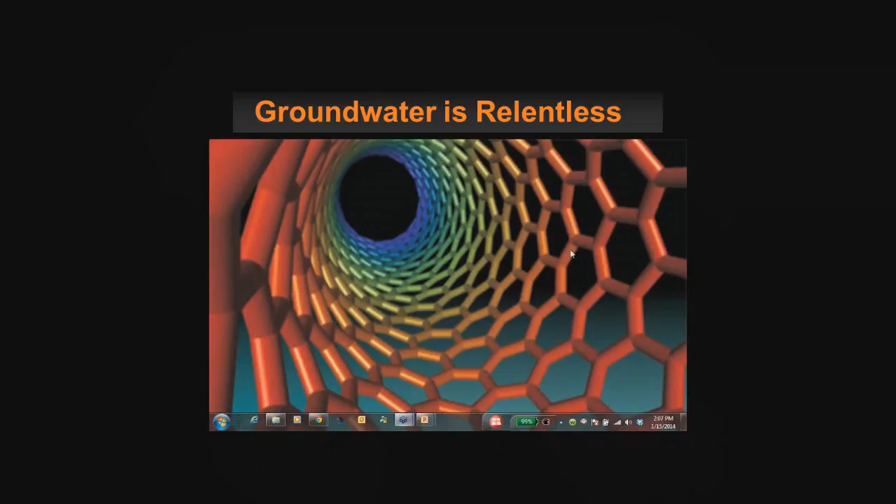Thank you, John. As everybody knows, groundwater, or more importantly, groundwater infiltration can be very relentless. The chances of water infiltrating any project are very high, especially since there's so much water on the planet, over 326 million trillion gallons.

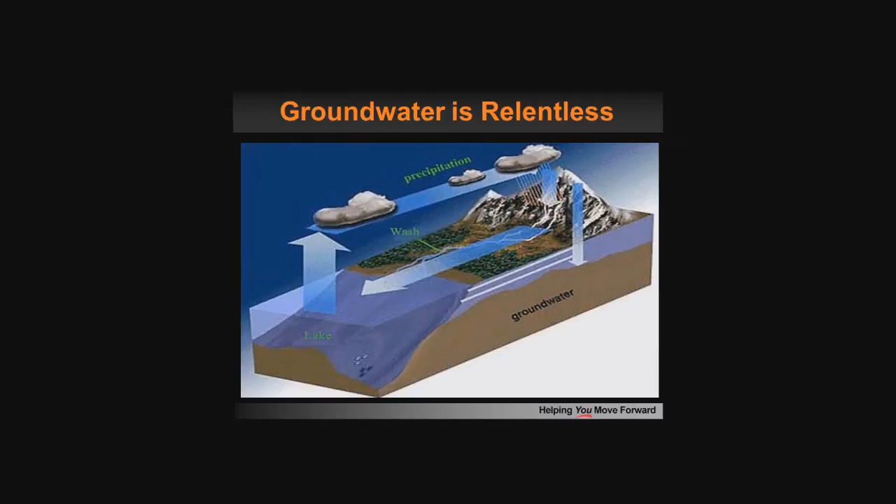And some of the things that we face day to day are sort of reflected in that last poll question. Safety is definitely one of the top most important things on any job site, with one of the biggest threats being immediate flooding. That can cause a lot of problems.

Many times most designers will try to foresee this with pre-grouting programs for the subsurface soils or rock to achieve safe and manageable inflows, but those unforeseen conditions can definitely cause immediate flooding and even loss of ground.

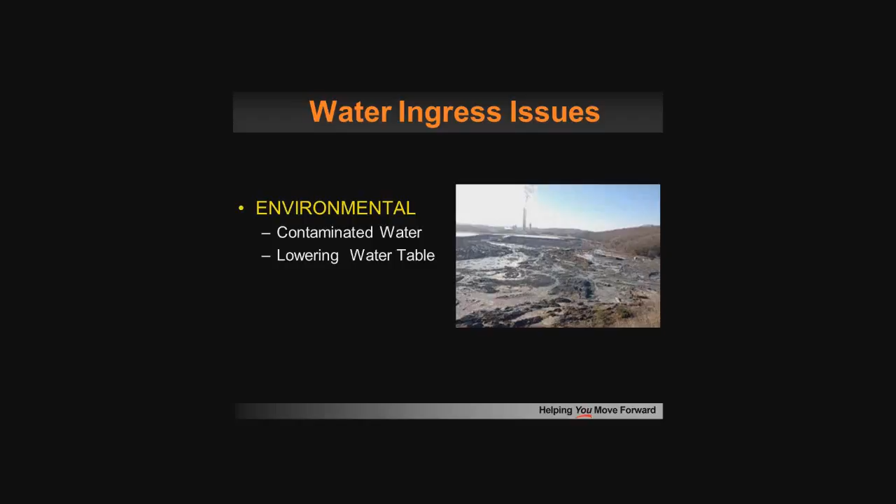Next issue is environmental: contaminated water or water tables. A lot of regulatory agencies require treatment of that groundwater prior to recharging it back into a stream or even back into the groundwater table. And obviously, the fewer the number of gallons that are pumped out of the ground, the fewer gallons that are treated, for fewer dollars overall.

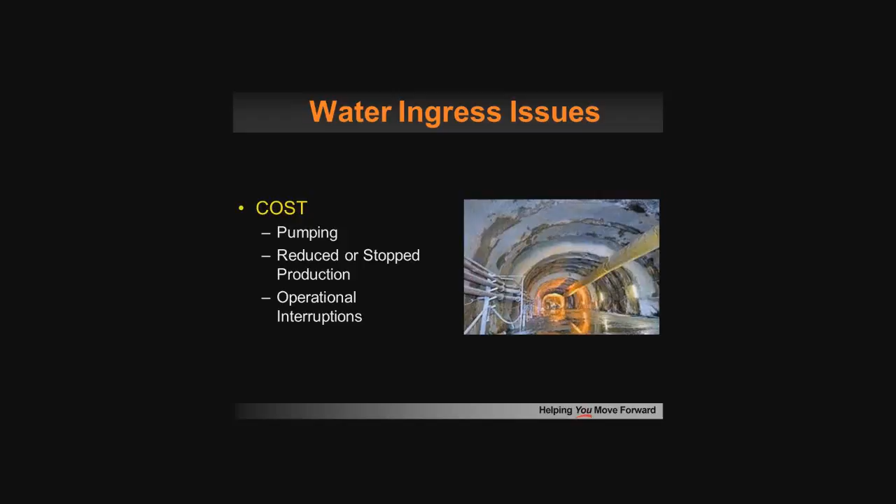Next are costs associated with pumping itself, and or reduced or stopped production or operational interruptions. If unforeseen, those types of water inflows, which can happen, can cause shutdown of a project and very costly remediation plans to get back up to speed. I mean, time is money on a construction site.

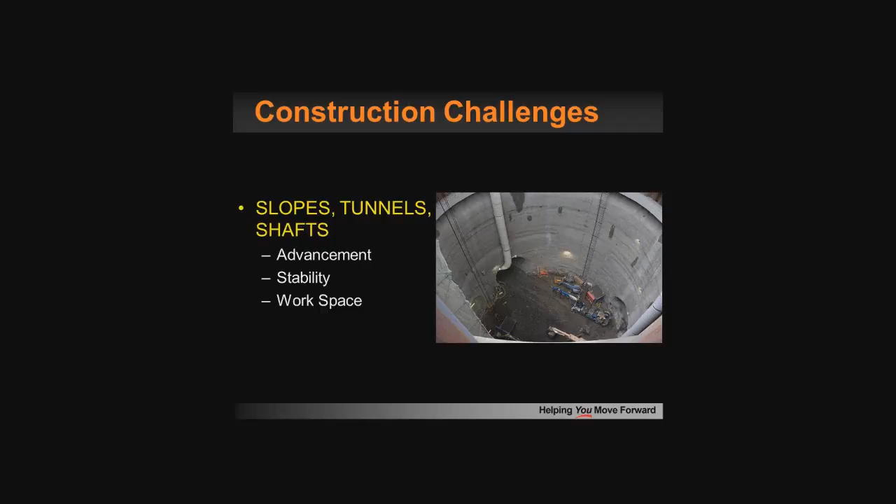Some of the challenges alone can be exacerbated by water with either the advancement of a mine slope or a mine shaft, or the advancement of a TBM. These can be greatly exacerbated and challenged by the presence of water.

And then, of course, the operating and maintenance nuances that come into play with the introduction of groundwater. The incessant onslaught of groundwater over time can cause equipment issues, corrosion on tracks or associated components, things like that. It can also create worker and public safety issues with trip and slip hazards.

So really, in summary, to recap and essentially that poll question, which I think a lot of people touched on, groundwater can be very challenging and cause big difficulties with design, construction, and maintenance. For contractors, engineers, owners, and agencies who have to deal with this on a day-to-day basis with any underground construction project, these issues can be very costly. And I think everybody is well aware of that, since there are millions of dollars spent annually trying to remediate and control the inflow of groundwater in underground construction.

But through the assistance of designers like Ward Knotts, who we have on the webinar today with ECO Grouting Specialists, and the use of cementitious grouts, chemical grouts, and solution type grouts, these challenges can be handled. They can be managed down to acceptable levels, and in some cases even eliminated. I'll pass it on now to Ward. Ward, I look forward to your grouting design presentation.

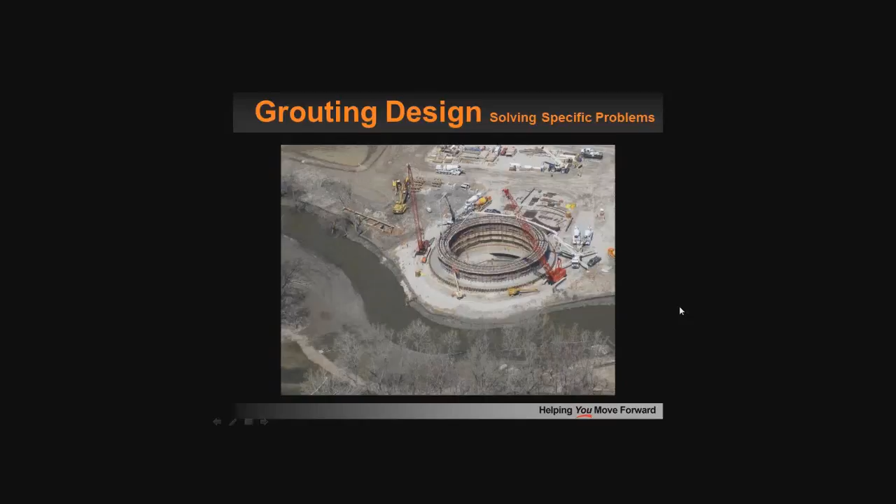And here's where the amenability theory comes into play. Amenability is a measure of the suitability for a given suspension grout to permeate fissures and apertures accessible to water in the grout zone. The amenability coefficient of a formation refers to what percentage of pores and fissures that are accessible by water are also accessible by grout.

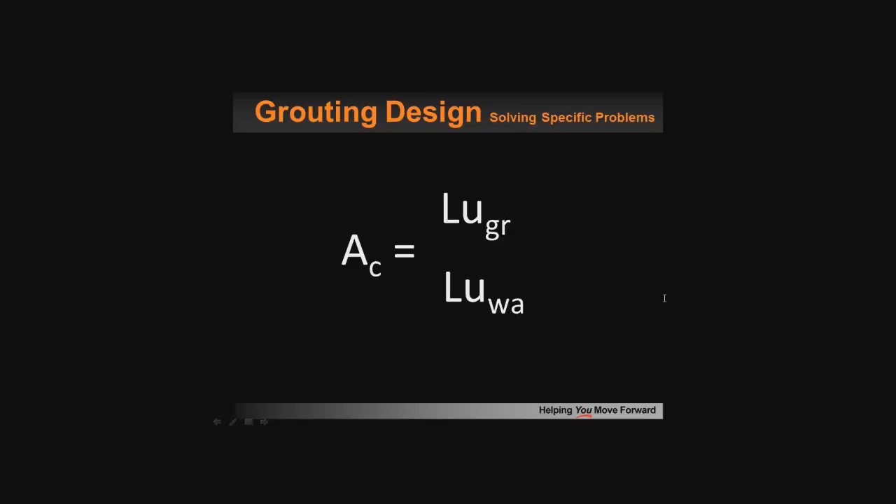So it's a quick and scientific method to determine if a grouting operation is on the right course, or if changes are required. Prior to injecting the grout, the permeability or Lugeon value of a formation to be grouted can be calculated by conducting what is commonly referred to as a water test, or in situ hydraulic conductivity test. And just to clarify, one Lugeon is approximately 1 × 10⁻⁵ centimeters per second.

Water is used as a test fluid and injected into the zones targeted for treatment. The total aperture size intersecting the borehole accessible to water is calculated.

During the initial stages of grouting, the Lugeon value for the same formation is determined, but this time with grout as the test fluid, often referred to as Lu-grout. The ratio of the Lugeon values—the Lugeon value of the grout divided by the Lugeon value of the water—is referred to as the amenability coefficient.

This ratio, or amenability coefficient, effectively sets the limit of what type of reduction in permeability can be obtained using a particular type of grout in a formation.

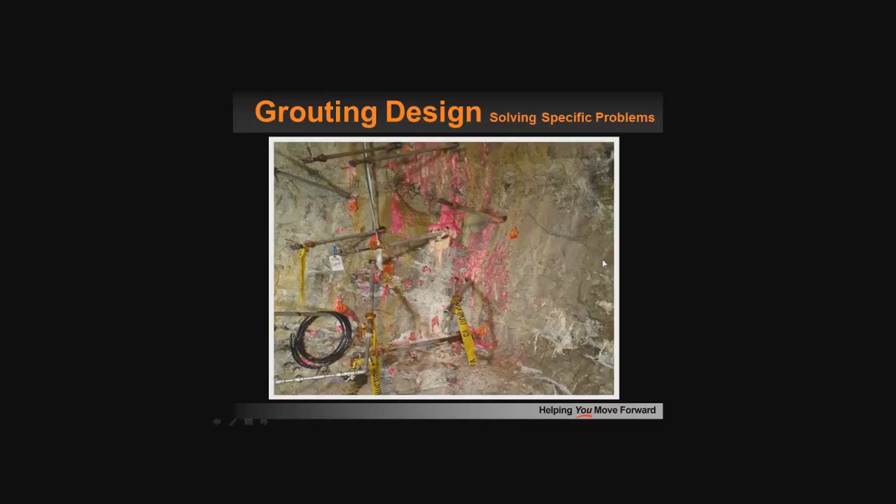In a limestone mine in Missouri, the construction of two sloped tunnels was temporarily halted due to significant inflows. The grouting operation was reviewed and the amenability theory was put to work.

Despite very high inflows, the amenability coefficient of the formation using regular cement-based suspension grout ranged from 0.01 to 0.05. This meant that only 1% to 5% of the pores accessible to water were also accessible to regular cement-based suspension grout.

The amenability coefficient of microfine cement was approximately 16%. This indicated that in this particular formation, conducting cement-based suspension grout operations would be a waste of time, as at best the residual permeability would still be 84% or higher.

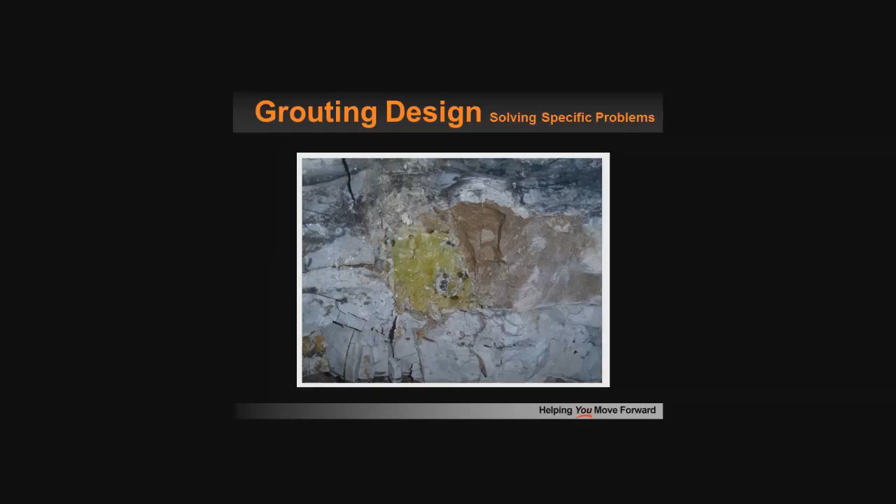Although it seems counterintuitive because of the large inflows, cement grout would be of very limited use. Once the grouting program was switched to a predominantly solution-based grout, the inflows were brought under control.

This is again the first slide, a picture of a grout hole in a mine. The outflow here was up to 600 liters per minute, about 160 gallons per minute, at a pressure of up to 900 psi. The amenability coefficient for cement-based grout was pretty much zero, meaning this formation would not accept a drop of cement-based suspension grout.

In a recent project, a TBM was launched from the bottom of a 93-foot-deep starter shaft on Fisher Island, approximately 20 meters from the Atlantic Ocean—so no shortage of water.

Once the TBM broke through the secant pile wall, enough water came through and around the portal to flood the shaft and the TBM. A grouting program was designed with regular cement-based grout.

Even though the grout hole spacing was extremely tight, the grout take was very poor and the residual permeability remained high. The amenability coefficient was quickly calculated, and it became clear that microfine cement-based grout was required.

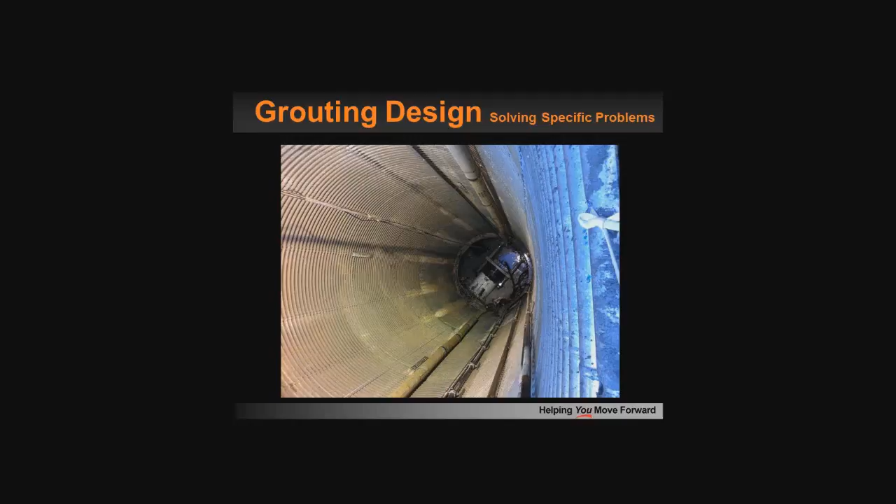The microfine cement-based grouting program reduced the permeability considerably, but the amenability coefficients indicated that the residual permeability and subsequent inflow would still be too high. The residual permeability was further reduced with solution grouts.

Grouts again with no particles. This slide is a view of the grouted formation once the TBM was removed for repairs. All the various grouts are visible, and you may notice two different colors for microfine cement, as two different types of microfine cement were used.

The dark green or blue would be a slag-based microfine grout, and the lighter colored grout would be a pumice-based microfine grout. And with this, I'm going to pass it to Brian.

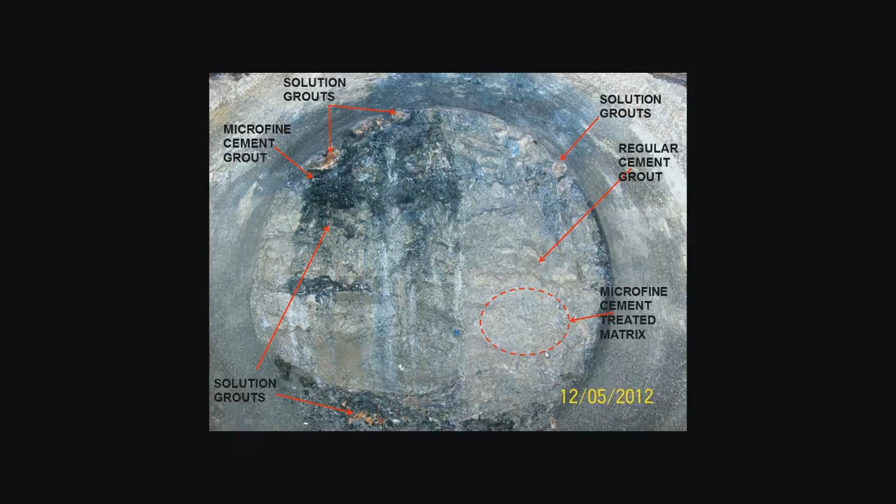I've been asked to cover some of the most common tests that can be performed, both in the field and in the lab, that will help ensure a quality grout solution. Today I'll be focusing on those tests that are geared towards cementitious grouting, which we perform here on a continuous basis in our efforts to improve our grout performance in a variety of applications.

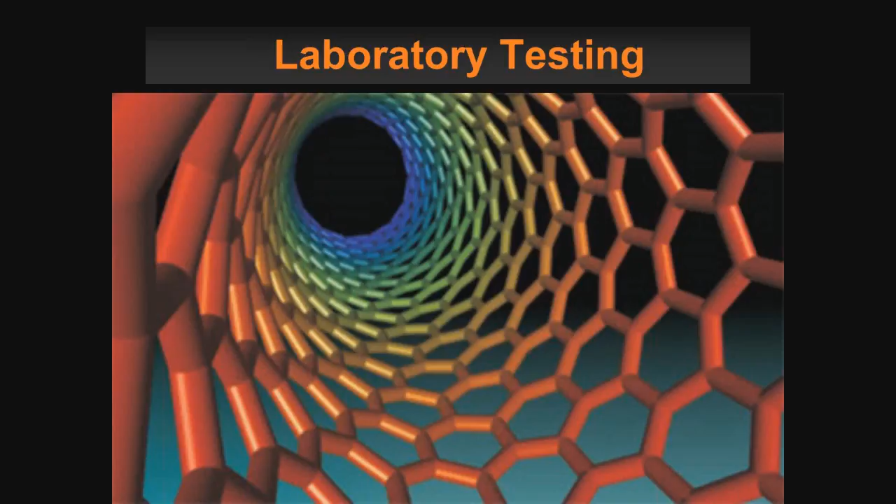Recently, I was privileged to see the value of these performance tests firsthand as I visited Ward and Eric and their team at ECO Grouting. Interestingly enough, there are very few tests that have been designed specifically for the grouting industry. In fact, most of the tests used today were originally designed for the drilling industry.

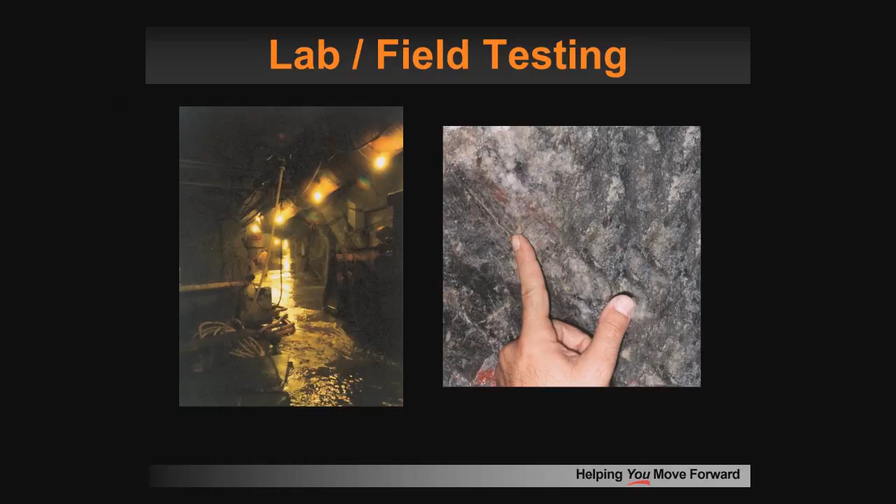Of course, the first step in evaluating a grout formulation is to correctly mix up the solution. In the lab, as well as in the field, when using an ultrafine or microfine cementitious grout, it is very important to use a high-shear mixer. This shearing action helps to facilitate the complete wetting and dispersion of each solid particle in the grout mix. Without this shearing action, it is likely the grout solution will contain agglomerated grout clumps that will impede the grout's performance.

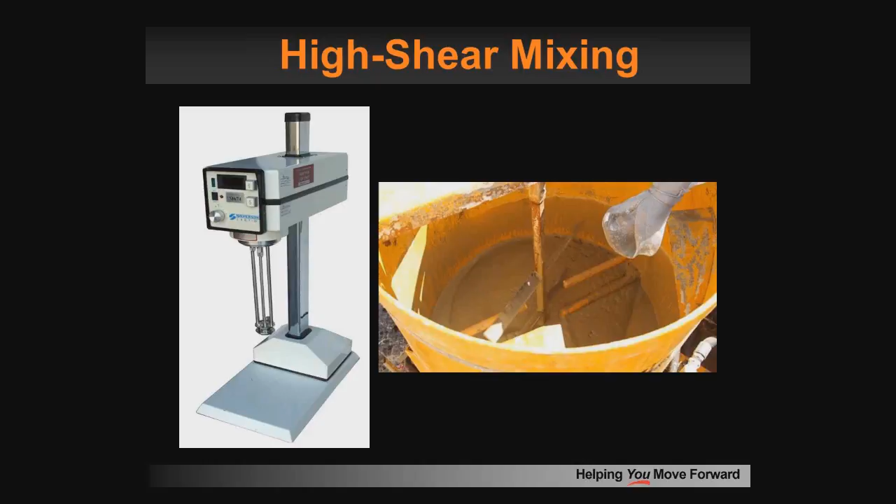After mixing, dependent upon the particle size of your grout, one of the first tests performed will be either the flow cone or the Marsh funnel test. Both tests are used to evaluate the flow properties of a solution and measure the efflux time, or the time required in seconds for a given amount of solution to flow through the cone.

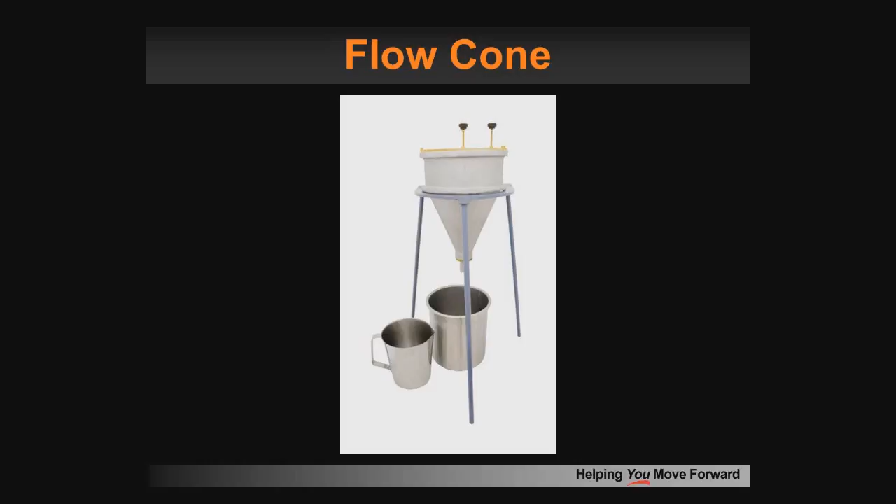The flow cone test is effective in measuring neat OPC grout solutions, as well as grouts containing aggregates up to a maximum particle size of 2.36 millimeters, or just under 1/10 of an inch. The Marsh funnel test, which is very similar in method and reporting to the flow cone test, is better suited for the finer particles found in today's microfine and ultrafine grouts.

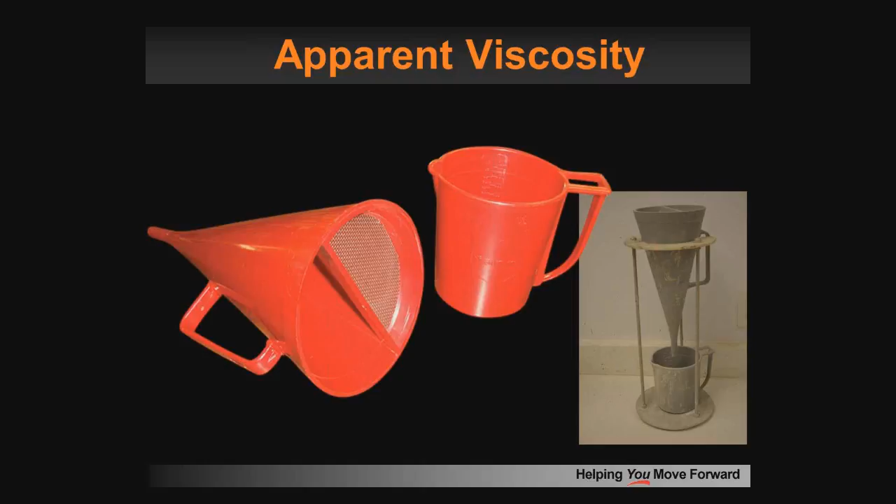Bleed in a grout solution is caused when the solids in the grout separate from the liquids. This can be very problematic, especially with higher water-cement ratios. Being able to evaluate the bleed of a grout formulation in the lab is very important when designing stable grout mixes. Essentially, this test is performed by pouring the freshly mixed grout solution into a 250 milliliter graduated cylinder and then measuring the amount of separated bleed water at 2 and 24 hours.

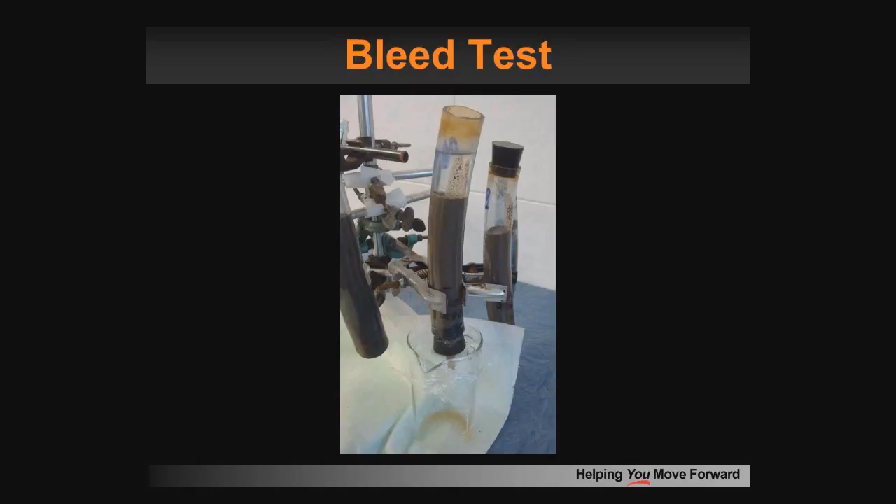The results are reported as a percentile. With regards to bleed, a grout is considered stable when it has less than 5%. However, the ideal would be less than 2%.

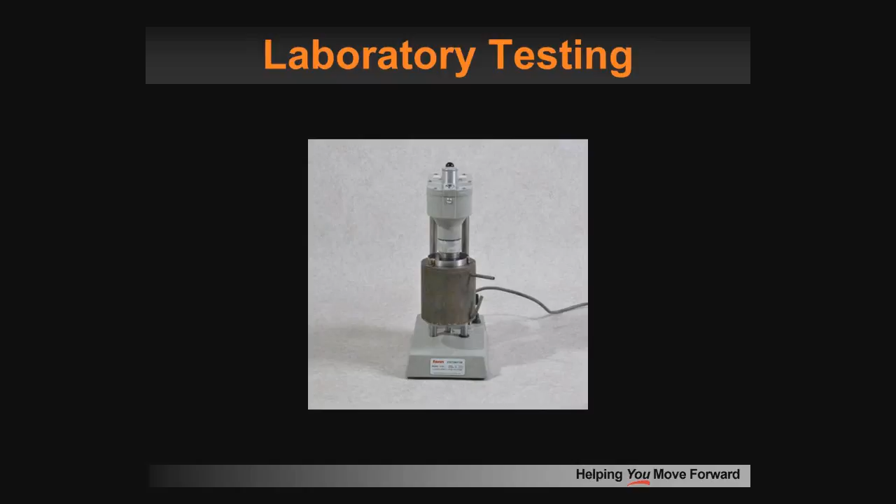Being able to quantify the cohesion, the plastic viscosity, and the yield point values of a grout can also be very valuable in determining how it will perform in the field. This is a fairly simple lab test where the mixed grout is tested using a viscometer, much like the one shown here. The pressure filtration test is another important lab test used in determining the stability of a grout. Although similar to the bleed test, the pressure filtration measures the separation of water from the grout solution under pressure.

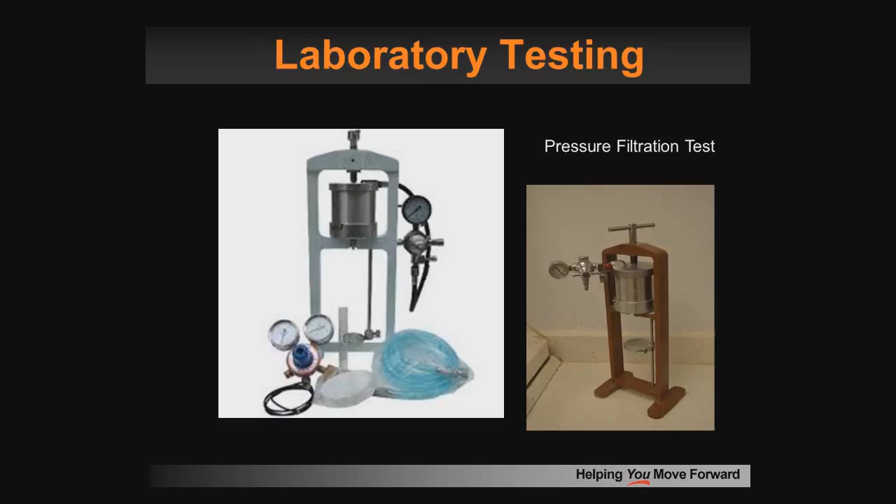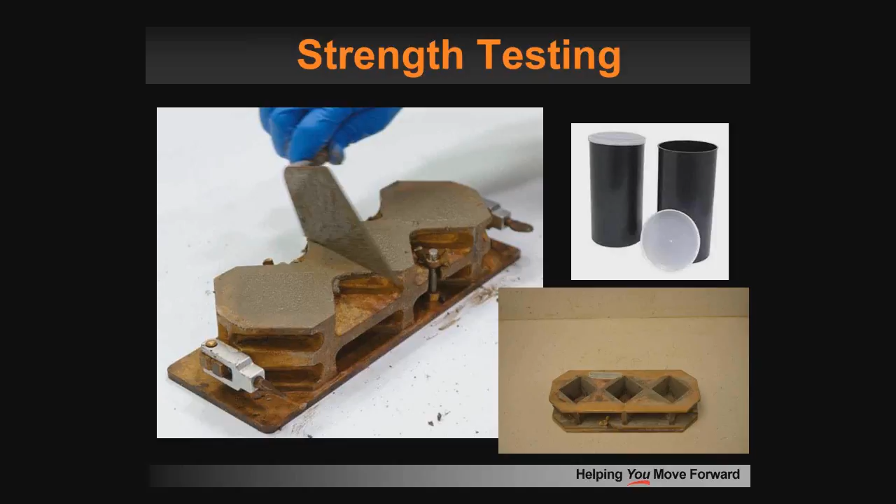In most grouting jobs, strength is of little concern as long as it is at least as great as that of the soil or rock being treated. Since most grouts do not contain aggregate of any appreciable size, test specimens are usually cast in either the 2x4 cylinders or 2-inch cubes. Two variations in measuring compressive strength in grout are to measure either in the pure or neat condition or as a grout solution injected into a soil environment.

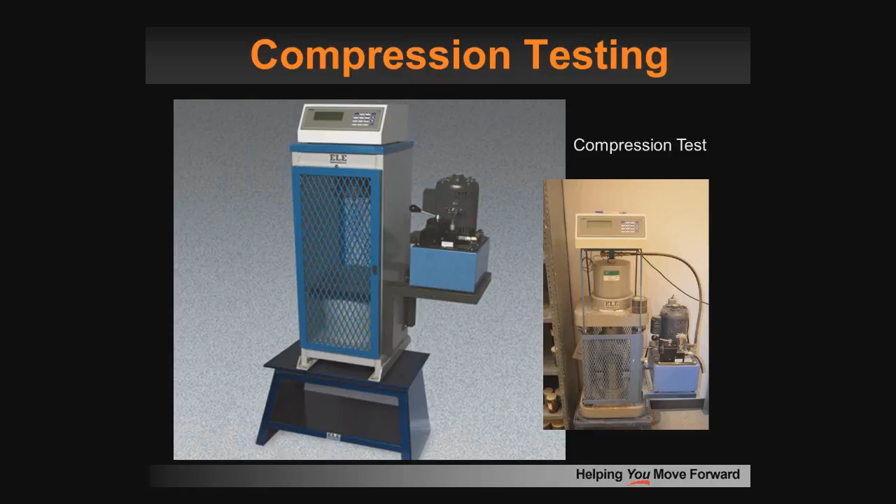In conclusion, I love this quote by Admiral Hopper: "One accurate measurement is worth 1,000 expert opinions." However, with that said, as valuable as these test results are, it is the correct interpretation of the results that truly benefits any grouting project.

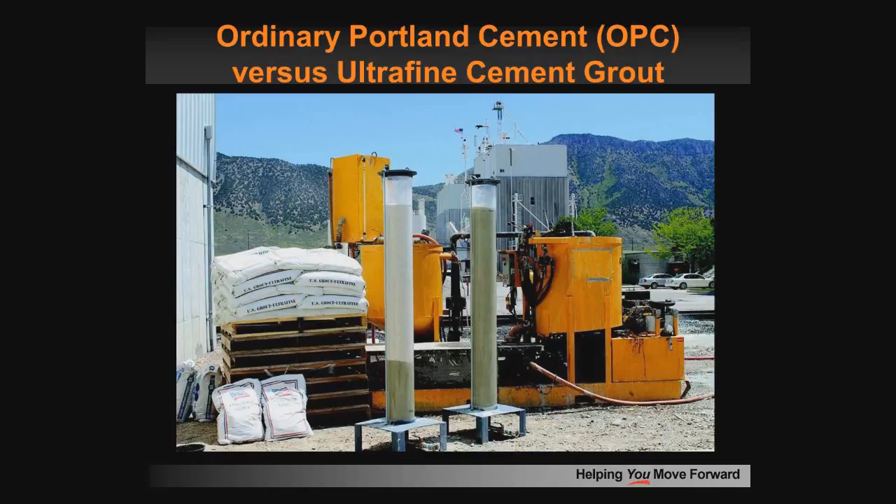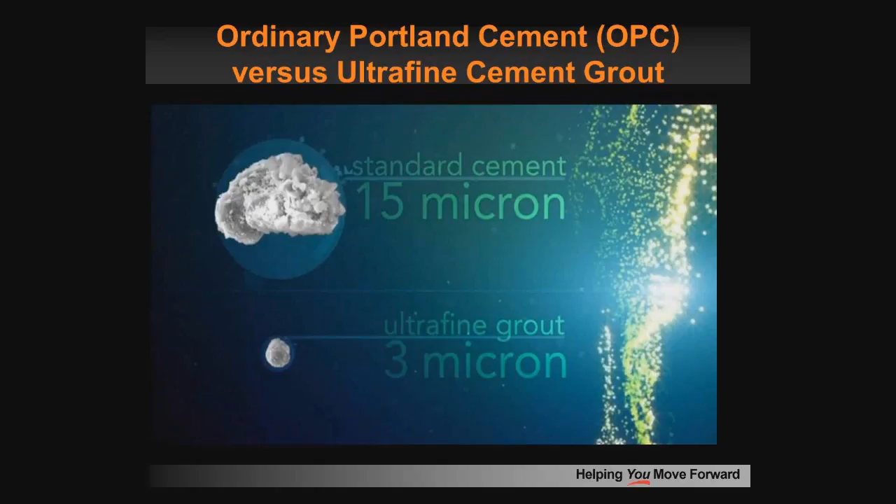As you can see, in this case, the soil conditions required a finer particle size in order to successfully permeate this sand column. As we see here, the ultrafine particle on average is 5 times smaller than standard OPC grout particle, and therefore is better able to penetrate these smaller voids.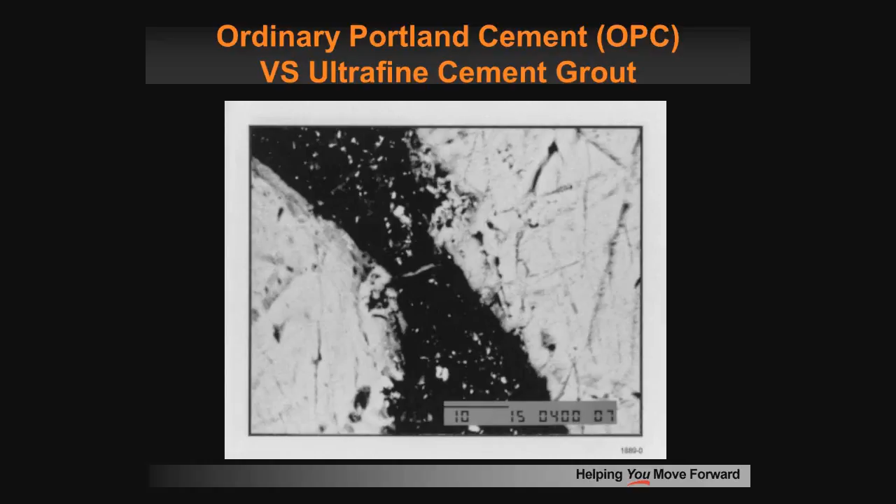Right there. Wow. Another factor in the ability of a grout to effectively penetrate, whether the application is geotechnical or structural, has to do with viscosity and flowability. Contrary to general public's understanding, the two are not always synonymous. A liquid's ability to flow does not always correlate with its viscosity. Viscosity can be defined as a liquid's thickness, which does not always correlate with a liquid's ability to flow.

Rheology is the study of the flow of matter. And although there is most certainly a relationship between viscosity and flow, they are not always exactly the same. Here's a simple example that we did here not too long ago. Here we took an ordinary glass of tap water, ran it through the standard marsh funnel test. The resulting time was 28 seconds. We then added a common household rinsing agent, effectively reducing the surface tension of the water, and reran the test.

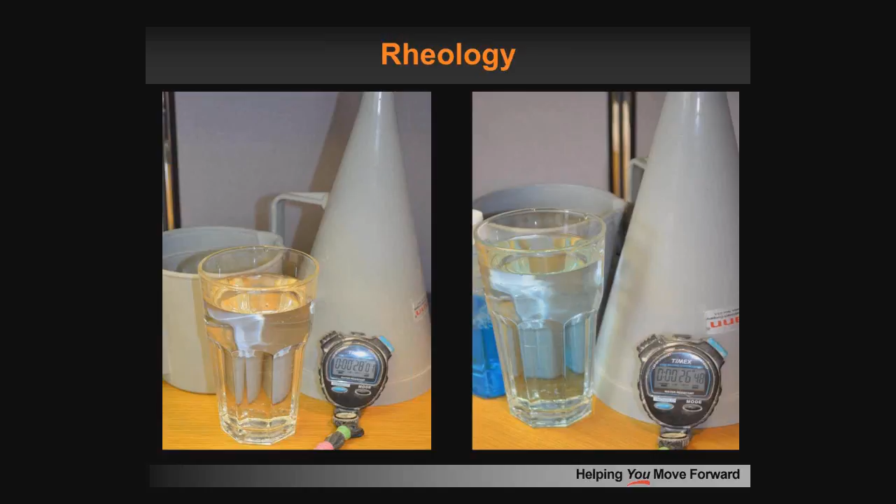This same amount of fluid ran through the funnel in 26.5 seconds. Although the viscosity remained exactly the same, the water's ability to flow was increased by 5%. This becomes a key factor in grouting applications and emphasizes the importance of selecting the correct admixtures for your specific project.

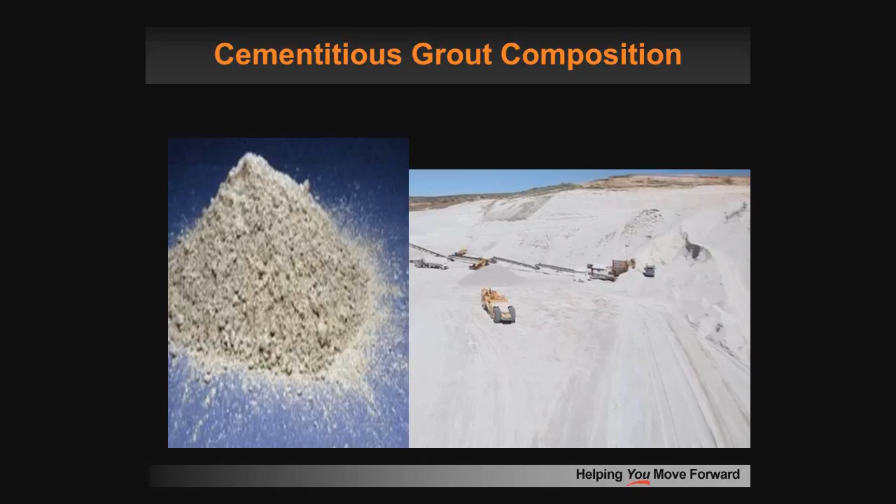Let's talk for a minute now about grout composition. Although there are various types of cementitious grouts, most consist of a mixture of a Portland or other type of cement and other various types of supplemental cementitious materials known as pozzolans. Well, what is a pozzolan? The value of having a pozzolan in a cementitious grout is significant.

The long-term strength and durability of any cementitious product is derived from the calcium silicate hydrate that is formed as a reaction between Portland cement and water. The more cement that you can get to convert to CSH, the stronger and more durable your cementitious product will be. Without pozzolan, only about 75% of the Portland cement makes this conversion. The remainder is converted to calcium hydroxide, which does not add to the strength, but can actually be detrimental to the final product.

Pozzolans in and of themselves are not cementitious. However, because of their high amorphous silica content, when they are finely ground and added to cement and water, they produce an important chemical reaction which converts the leftover calcium hydroxide to the desired CSH, thereby strengthening the cement and reducing the negative effects of the calcium hydroxide. This CSH conversion process can continue for decades.

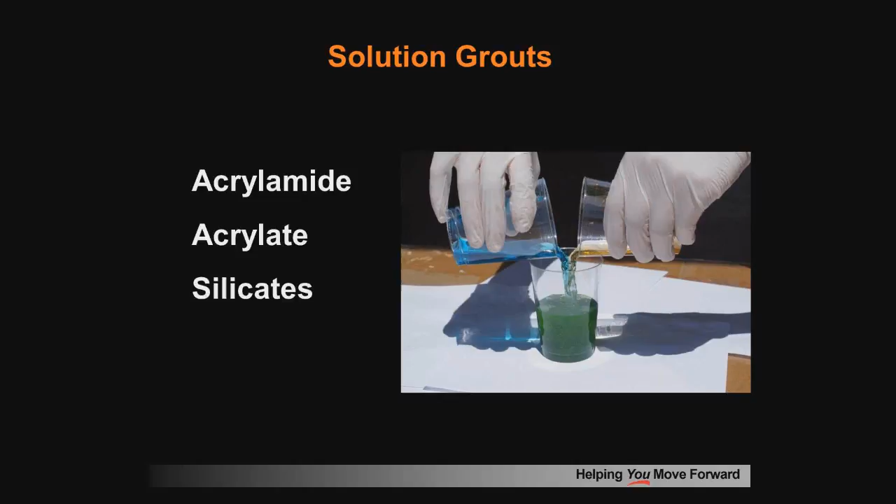Acrylamides and acrylates are generally used for more permanent water control, where they have lifespans of 360 plus years and 50 years respectively, while sodium silicates are considered for temporary water control and soil stabilization with a functional lifespan of only a few years. With regards to viscosity, acrylamides are in the range of 1 to 2 centipoise, while acrylates are slightly thicker at 3 to 4 centipoise, and sodium silicates typically range in the 5 to 7 centipoise.

Most acrylates and sodium silicates have set times that range from a few seconds upwards to an hour. In contrast, Avanti's acrylamide and acrylate grouts have the ability to control set times from a few seconds to nearly 10 hours. That brings us to the end of my portion of the presentation. I'll be glad to turn the time back over to Ward to discuss a few injection techniques.

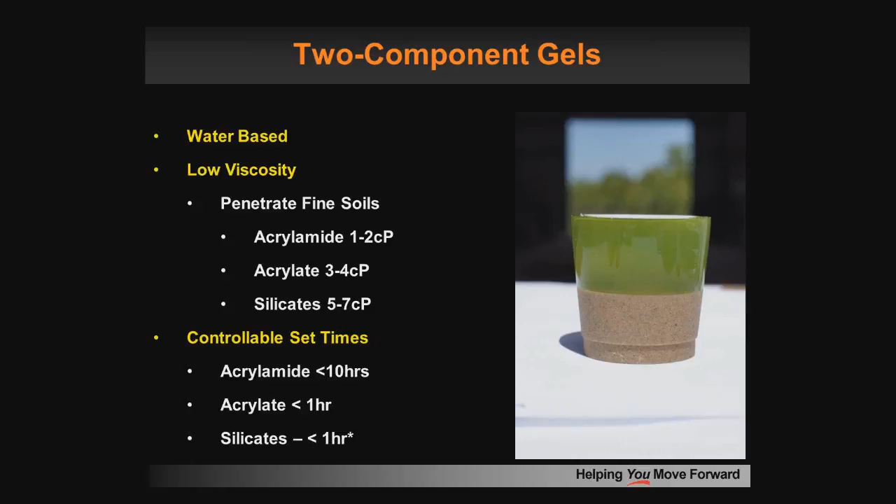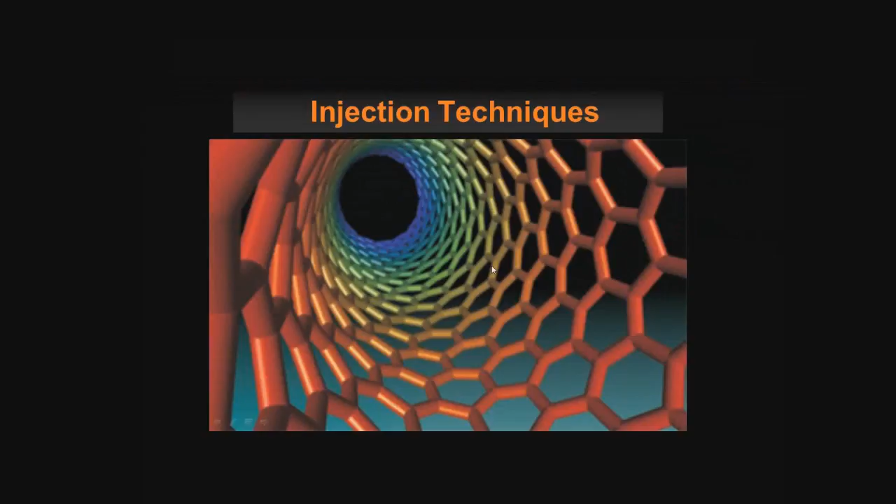Sometimes the borehole is subjected to a variety of borehole preparation procedures to clean the borehole from debris and to ensure intersected fissures and pores are accessible to grout. The borehole may receive an in situ hydraulic conductivity test or water test and is subsequently grouted. Typically, this is the end of the history of that particular borehole. Indeed, sometimes the borehole is partially re-drilled to a deeper elevation and regrouted, but typically a borehole in rock grouting receives one grouting pass.

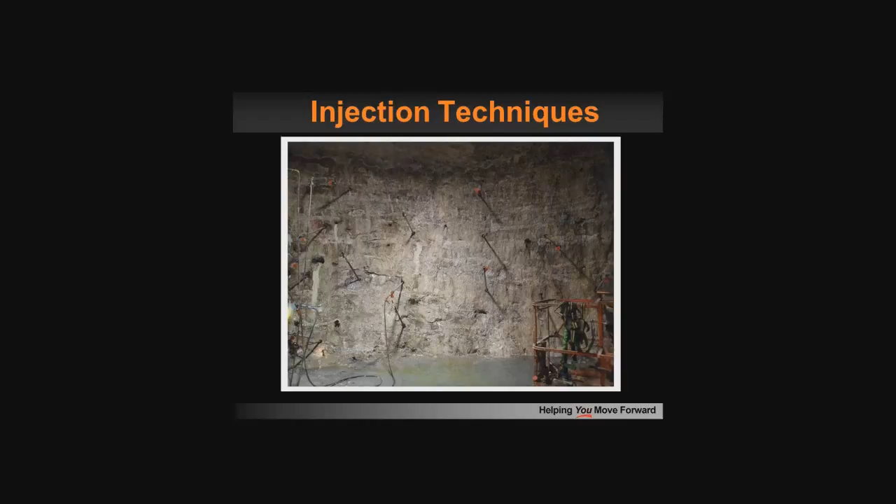It's a pipe equipped with ports, which are typically small holes or slits that are covered with sleeves. The sleeves are made of rubber and act as one-way valves. The ports are spaced at regular intervals, and the grout is delivered in the pipe via a single or double packer. The sleeve pipe allows practitioners to inject the grout at specific locations in the subsurface, and the pipe is re-injectable.

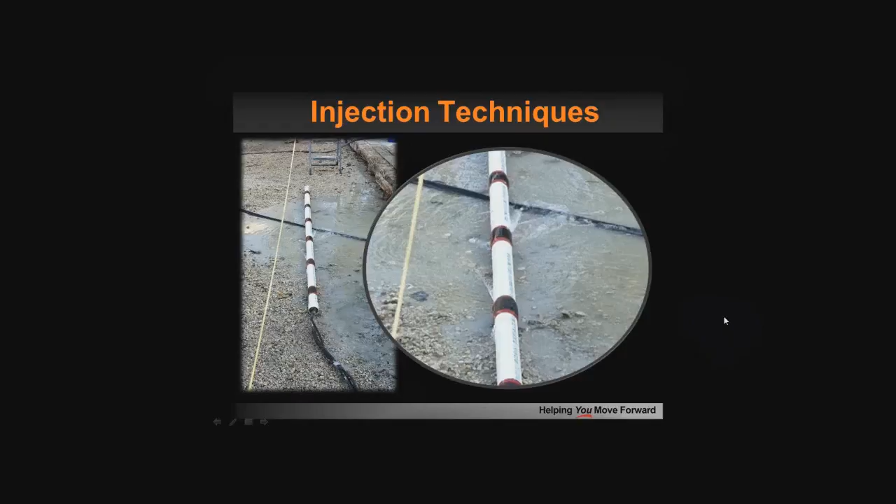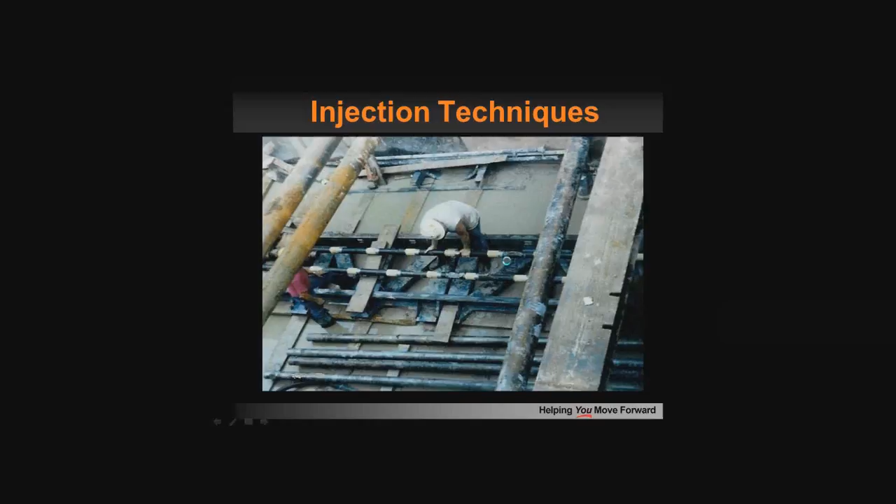The re-injectable feature is the key component to any soil permeation grouting program. This slide features steel sleeve pipes that were installed horizontally. The previous slide featured PVC sleeve pipes. The key to success in virtually any soil grouting is that the strata targeted for treatment needs to be injected multiple times. The formation in this slide was subjected to several grouting passes to facilitate the construction of a tunnel.

The tunnel trajectory traversed through rock for the entire section, with the notable exception of this section in the slide. The rock dipped and was absent, so the soils through which the TBM had to mine were grouted and consolidated prior to any tunneling operation. So it's a kind of pre-excavation grouting program.

Initially, the zones that are the most pervious during the first grouting pass will be the least pervious during the subsequent grouting passes. And by injecting soils multiple times, solid grout columns can be created. And when the columns overlap one another, a grouted conglomerate can be created.

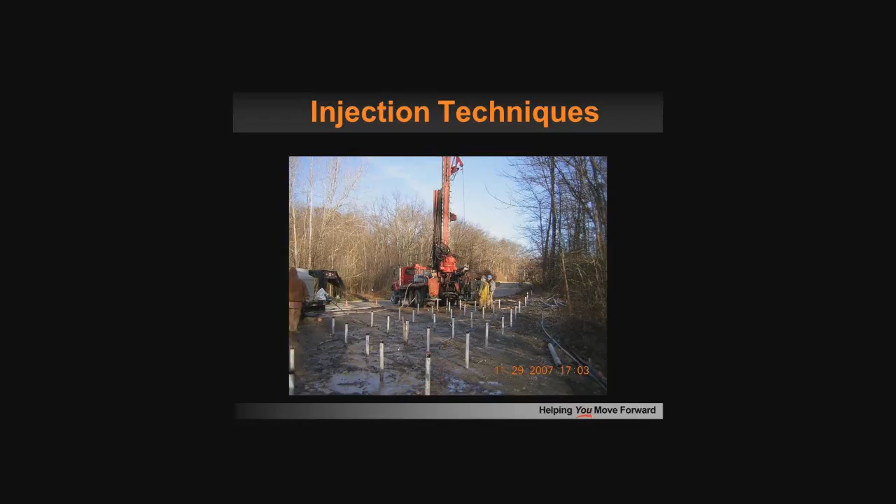In addition to different grouting delivery mechanisms in rock versus soil grouting, the grout formulations may also differ in rheology. And naturally, refusal criteria for an injection of grouting paths in rock will differ from a grouting path in soil. In rock, it's typically recommended to grout to absolute refusal and sometimes maintain pressure on the grout hole for a certain period of time or until grout has reached a certain stage of gelation. In soil grouting, often there is a volume refusal criteria for a particular grouting path. And these are just some of the many differences between rock grouting and soil grouting.

And with this, I'm going to pass it back to Britt. Britt, you could be on mute.

Thank you, Ward. I'd like to dive into now some case studies where both microfine cements or ultrafine cements and solution grouts were used in mining, tunneling, and subway type applications. To begin, a couple of notable projects where cements, or ultrafine cements, were used: Notre Dame Stadium and Rose Bowl. Tunnel accesses into both of these structures were stabilized using cementitious grouts. So good successful projects in that application into soils and rock.

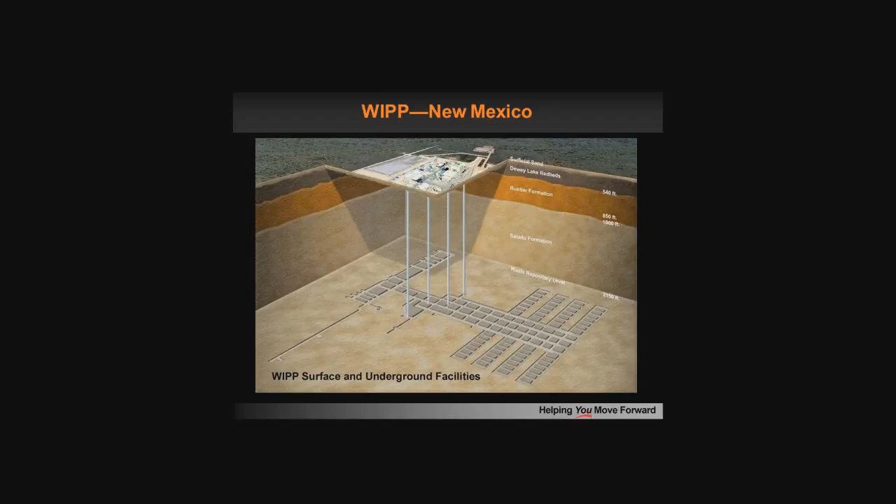Next project is WIPP, or the Waste Isolation Pilot Plant, where cementitious grouts are used to seal water inflows for the disposal and storage of hazardous waste at depth within sedimentary bedrock type formations. Next project is Hollywood Tunnel out in LA. Cementitious grouts were used here to help re-level this in order to reestablish the tunnel alignment.

Another project, this is a project that Ward has already alluded to, a limestone project where water infiltration was a challenge. And of course they used a solution grout in this situation to help advance this mine slope because of the poor amenability of both Portland and a microfine cement in that scenario.

Next project is Lake Mead. This is one of the intakes where cementitious grouts or ultrafine cements were used to seal high pressure waters in the rock fractures, to seal off the inflow into the intake tunnel. Very high pressures in that situation, and they were very successful in achieving a high reduction in water inflows.

Another project, salt mine. As everybody knows, salts are highly dissolvable by water and can be very dangerous. Water inflows into these situations can quickly and rapidly flood the mine or cause dissolution of the salt itself. And so cementitious grouts are used in salt mine type applications pretty extensively in order to help control water in that situation.

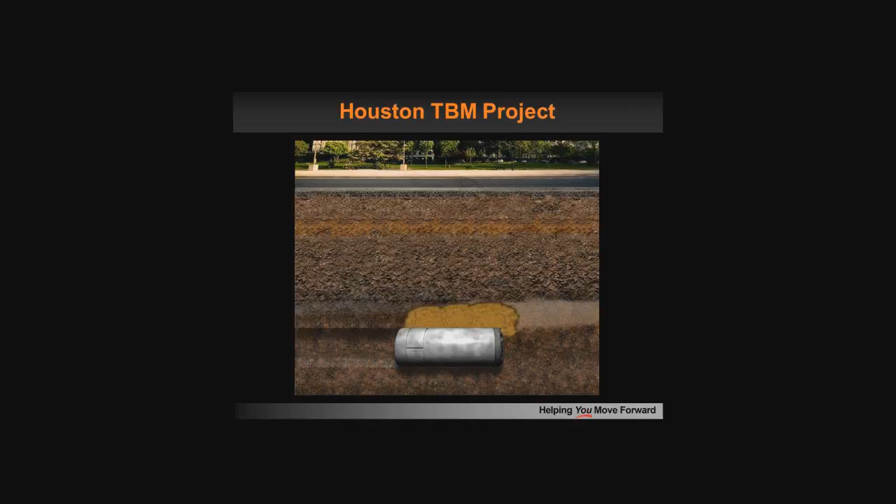Tunnel boring machine project in Houston. In this particular situation, they anticipated homogeneous material throughout the entire TBM alignment, but what they encountered was a softer zone above as the TBM progressed, causing the TBM to pitch up. They actually came in and reinforced or chemically grouted that weaker zone, allowing the TBM to have enough resistance and maintain alignment on that particular project. So that project did finish successfully, and it was a sanitary sewer force main, or gravity main.

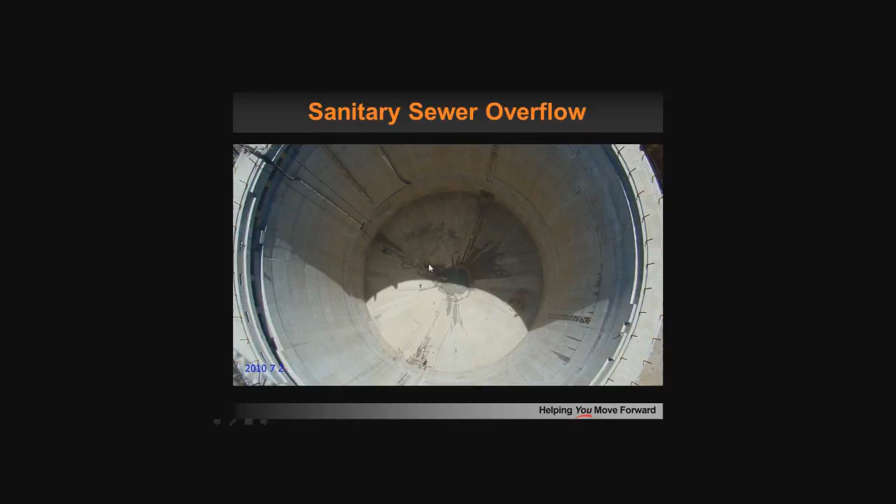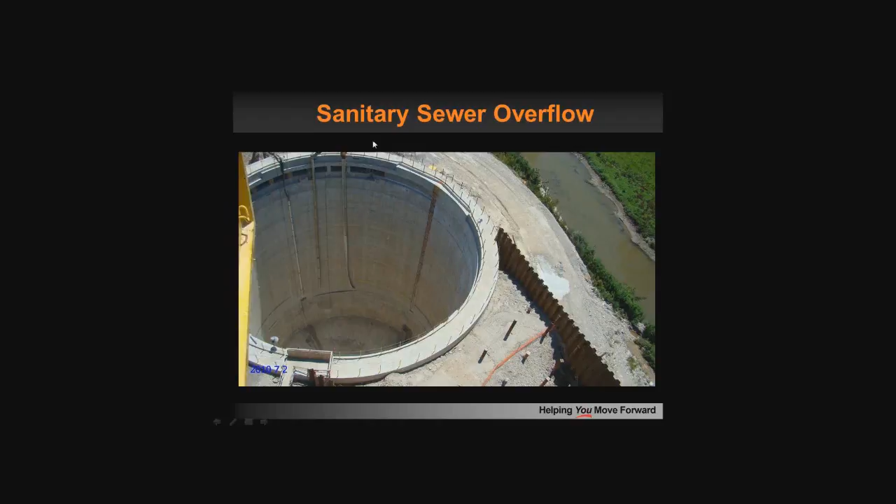Another project that is not necessarily a shaft for a mine or a TBM, but very similar to a shaft type construction. This particular sanitary sewer overflow is 150 feet deep by roughly 150 feet in diameter. Here, both cementitious grouts and a solution grout were used to seal off water inflows that would not have allowed this construction to occur had the water not been controlled prior to the start of construction. Here you can see some of the leftover standpipes that were part of the construction that circled around the shaft, if you will.

Coal mine in Illinois.

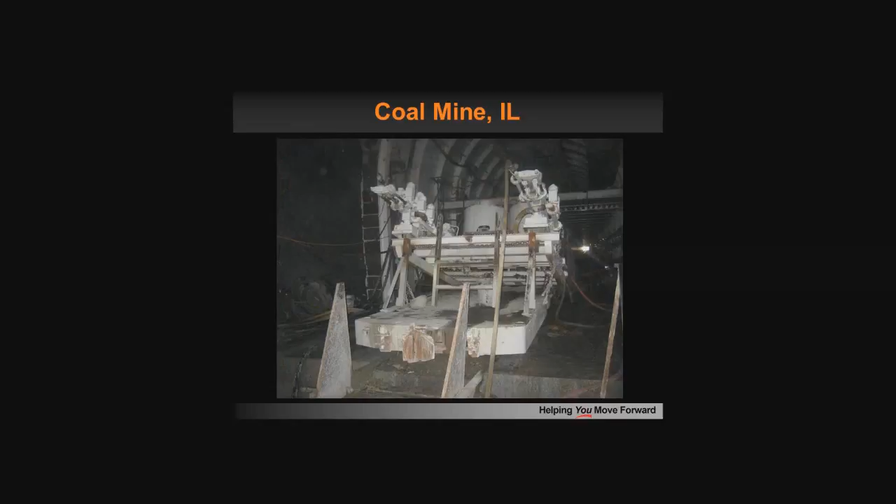Again, another project where both cementitious grouts and a solution grout were used in sedimentary bedrock type formations. They were able to pump both grouts over long distances and use the cementitious grouts into the fractures of the bedrock, and then use the solution grout in the matrix type geology that occurred within those mine slope advancements.

Another project that's very notable is the Toronto TTC, or Toronto Transit Commission. They've been pumping a solution grout, encapsulating their subway systems and controlling groundwater for over 15 years successfully, and they actually have their own internal team that has been doing that for 15 or 16 years now, and it's still ongoing. Many miles of existing subway with many more miles being installed, and the need for water control in that situation. Very successful. Don, I'll pass it on to you now.

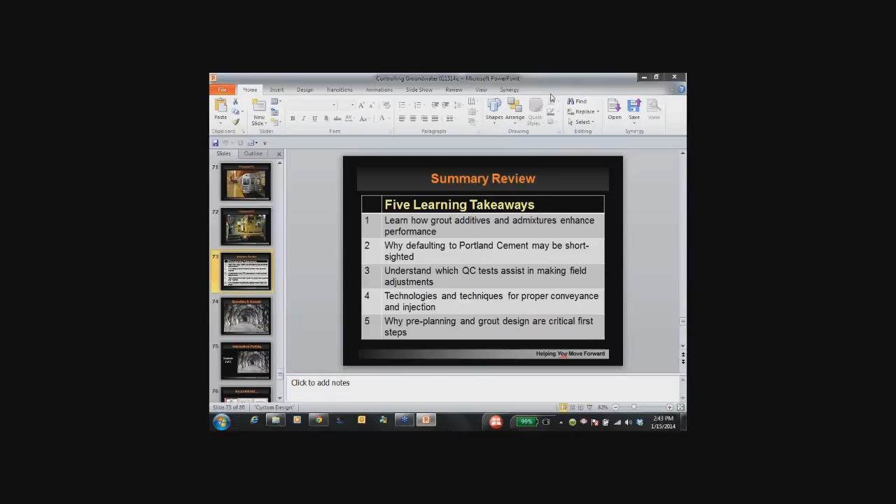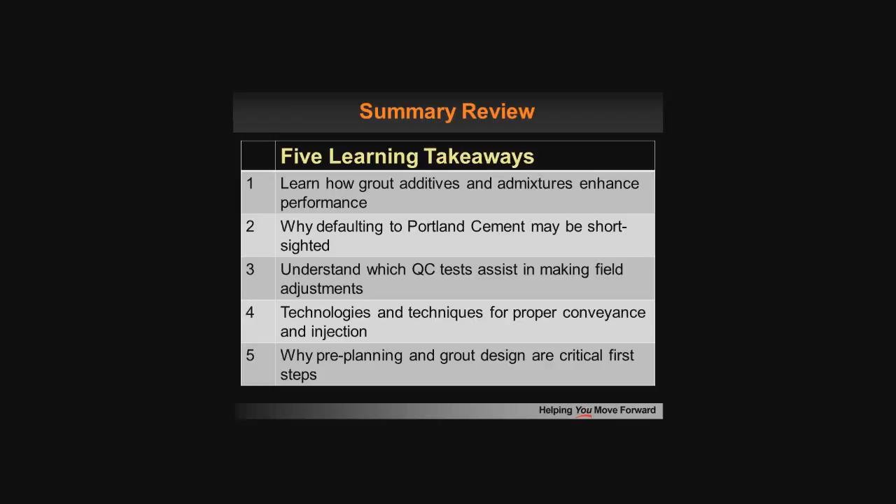But permit me to highlight something Avanti deems important. In the announcements leading up to this event, we itemized 5 takeaways that you would yield from this presentation, and above all else, we need to make certain we deliver on this promise. We learned how grout additives and admixtures enhance performance. From Brian, we learned why defaulting to Portland cement may be short-sighted. And we now understand which QC test assists in making field adjustments. Ward showed us technologies and techniques for proper conveyance and injection, and we discussed why pre-planning and grout design are critical first steps, a core value of ECO Grout Specialists.

I'd like to open this up now to a question and answer, and I have a plethora of questions, a few of which are very interesting here. What rule of thumb do you use for penetration of fractures? I have always heard that a fracture must be 6 times the size of the largest grout particle. Does that theory hold up to your beliefs? Ward, I'll let you respond to that.

I think obviously you can't force a ping pong ball through the eye of the needle, but essentially, if the fracture is smaller than the particle size of the grout, it's not going to go through, but I don't think it needs to be 6 times larger. For solution grout there are no particles, so they will go through it. And for particles, I think typically we look at the D90 and the D10 for it to go through. But yeah, if the particle size in the grout is larger, it will definitely not go through any pore or fissure, but I don't think it needs to be 6 times. I like the analogy.

Brian, you mentioned the sand column test. What is the real significance of this test in regards to real-world application? Well, in a real-world application, it's really kind of a partial test. Although it does demonstrate the permeability of a grout, to really have good application in the real world, you need to also capture the grout that flows through the sand. So that would be on the top side. Since you're injecting on the bottom, you would recapture that grout, do another mud balance test, and then compare the specific gravity of the grout coming out to the specific gravity of that going in, and that would tell you how many solids you lost. An acceptable amount of solids to be lost would probably be 10% or less. That would be your ideal.